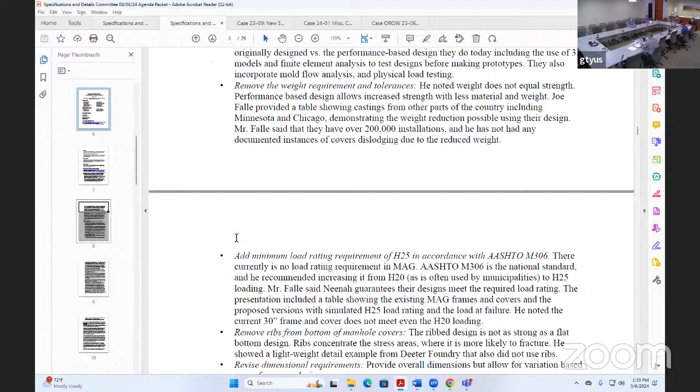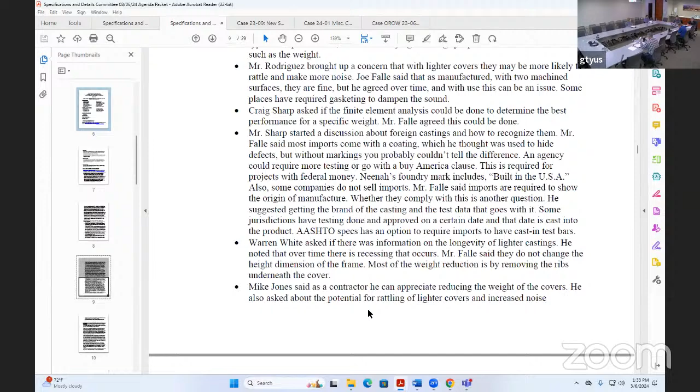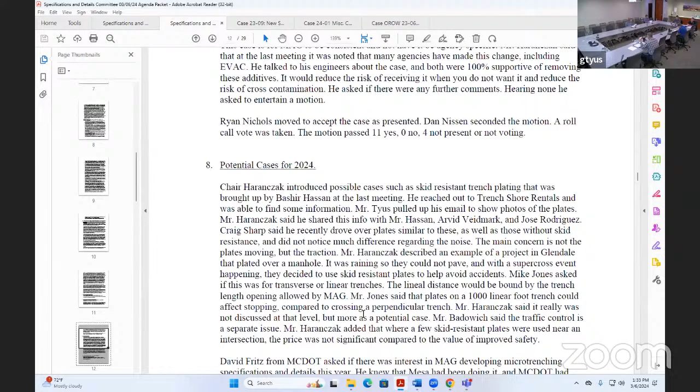Agenda item number 3 is the approval of February 7th, 2024 meeting minutes. Gordon will pull those up. If you need to refresh your memory on the meeting minutes, feel free to look at your screen. Keep in mind that you could also follow the previous meeting on YouTube. It is broadcast there.

All right, at this point, I'll entertain a motion to approve the meeting minutes. Gene, I'll motion. Mr. Chair, this is Warren. I had one correction that, Gordon, I had emailed you after the fact. I can speak to it if I'm able. Yes, please do, Warren. Item 5, second paragraph. Gordon, if you wouldn't mind scrolling up to that.

In that second paragraph where it starts, Warren White said, it should say Warren White said he plans to update the connections detail to add the twist lock connection, parentheses, snake bite, which is more robust than the direct bury wire nut. Period. Thank you, Warren. Good catch on that.

Warren, was what you just said in the email you sent me, so I can just copy and paste it from there? I believe so. I may have paraphrased in the email I sent you, but I can send you specifically that verbiage if that helps you. Yes, that would, so I get it in the minutes correctly. Thank you. I'll send it. Otherwise, everything looks good. Thank you.

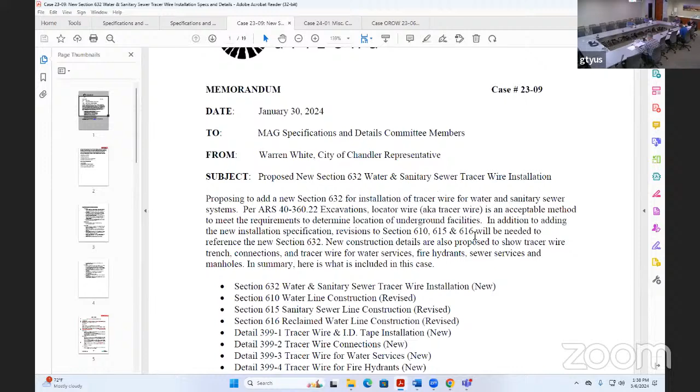New construction details are also proposed to show the tracer wire trench, connections and tracer wire for water services, fire hydrants, sewer services, and manholes. I did circle back with my water distribution group, and they had a comment or two that our representative was going to take back to the water sewer working group. I don't recall what that comment was. It was something to do with the termination inside of one of the boxes, but we'll open this up for discussion if anybody has any questions or wants to discuss this topic.

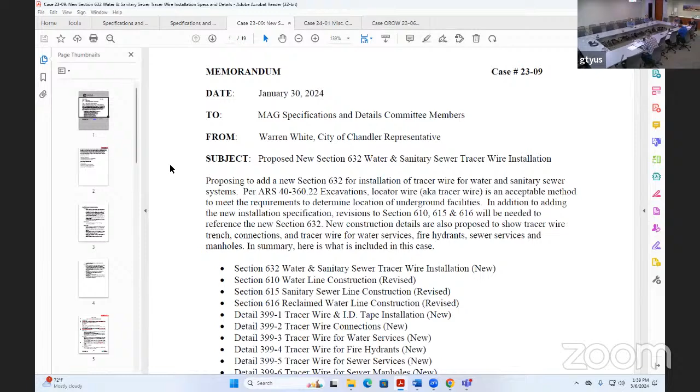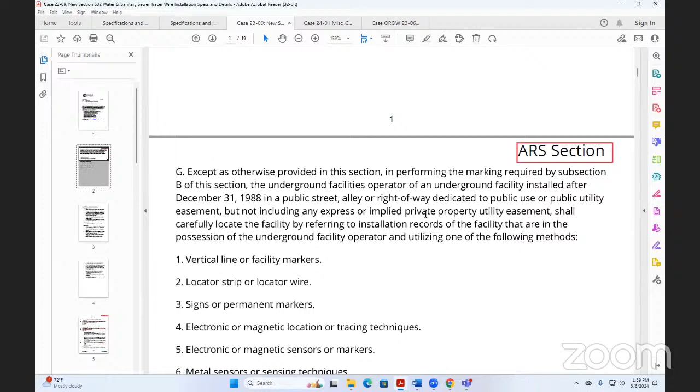Mr. Chair, I might just add, this update does include some comments from City of Phoenix, some of their comments that I received from them. I summarized the March updates right there. So that's what's new here. In addition, I have shared this out to another entity. The company is Copperweld. I sent that out last week. I have not received any feedback yet, though. Okay, thank you for that update, Warren.

Does anybody else have any comments, questions, anything they want to bring up on the tracer wire? All right, hearing none, we'll go ahead and move to agenda item number 5. These are new cases for 2024. We have Case 24-01 miscellaneous corrections. We're looking at section 325.8 quality control. Second paragraph, remove the extra space in shall.

There's another miscellaneous correction that I wanted to bring to everybody's attention. I'd like to put it under miscellaneous corrections, and that's to align MAG 120 with MAG 270 for the verbiage related to the concrete adjustment and the radial score marks around. I believe it's 120. 120 does not include the radial score marks. Thank you, Gordon, for bringing that up. 270 does. Everything else matches as far as the type of concrete, MAG AA, the thickness, the diameter, everything else. It matches perfectly. It's just that one item we're missing.

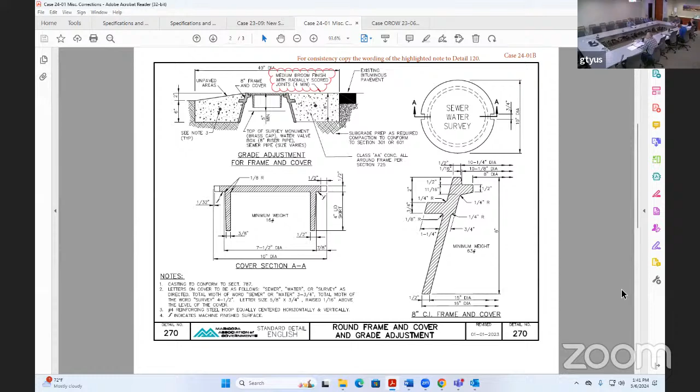I'd like to get some support in moving the radial marks onto 120. If we have support with that, we'll get that on for miscellaneous corrections. Does anybody have any comments or questions on this topic? That's a great catch because I didn't even know that it wasn't in there. Just like everything else, this is stuff that's brought to my attention by others, and I appreciate that.

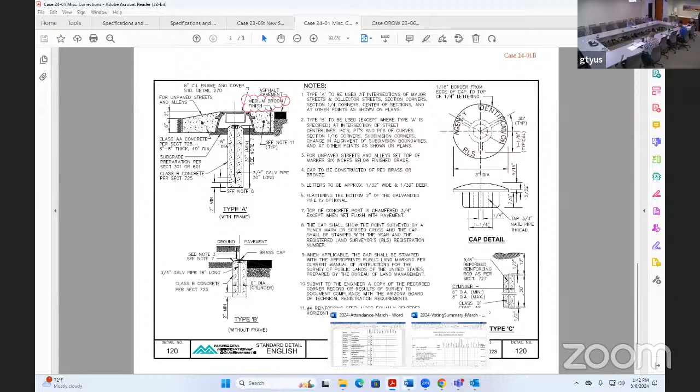Gordon, would you be able to put this under miscellaneous corrections for me, please, for the next meeting? Certainly. I think, to me, it's a no-brainer. I'd like to get some input from the rest of the voting members or even industry for that matter. It's pretty straightforward. Yeah. So we potentially have one more. Gordon's going to bring it up right now. Okay. And see what the consensus of the group is.

At our last working group meeting, we had something brought to us in MAG section 714. Let's see if Gordon can bring it up here. Give him a second. It's easier if it's on the screen, probably, to kind of walk everybody through it at the same time.

No, but I can resend it real quick, but it was on the 16th. It was back on the 16th. I can probably resend it just as fast. Oh, there, you got it quick. Never mind, Gordon's quicker than I am. No, so it was that one. Yes, right there. So if you would hold that one up.

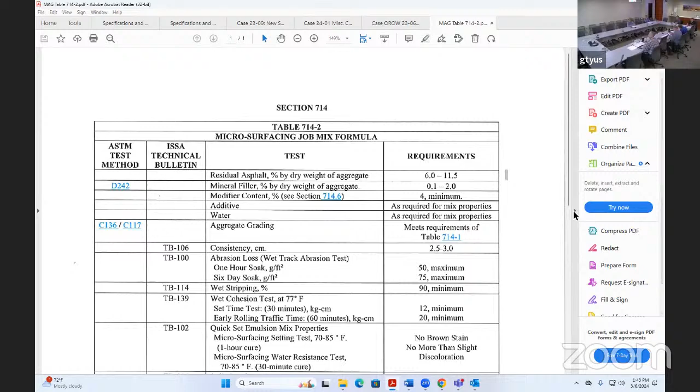So this is in regards to 714-2 and microsurfacing and the job mix formula, if you can roll up just a little bit. So the technical bulletins are basically from the International Slurry Surfacing Association. These are all documents done by them. It's been referenced in MAG for a long time. Very similar to some of the AASHTO or ASTM updates when we get them.

It was brought up to us that in the 2022 revision, TB 147, the second one up from the bottom, the specific gravity maximum has been removed from that technical bulletin as of 2022. That was the only change to it, and they were asking basically if we update and follow that bulletin as listed, there's no maximum specific gravity requirement within the new bulletin. I don't know if that would be a miscellaneous correction. I think that would lean more toward a case.

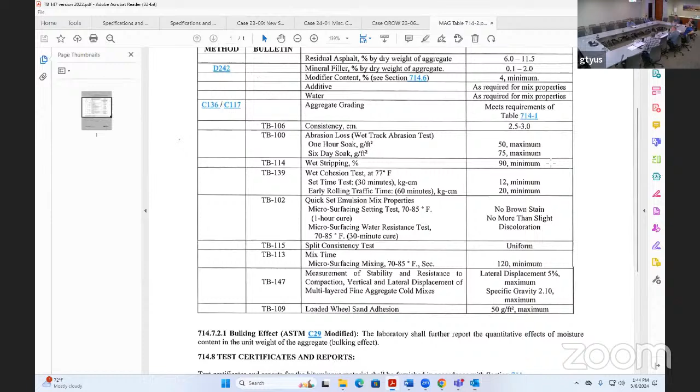And do you have the technical bulletin? It's another one of those attachments, I believe. So there's the two versions. You've got the 08 version and the 22 version, so you can see the differences, and then the response from ISSA themselves as to the reason why. I have to roll through that one a little bit.

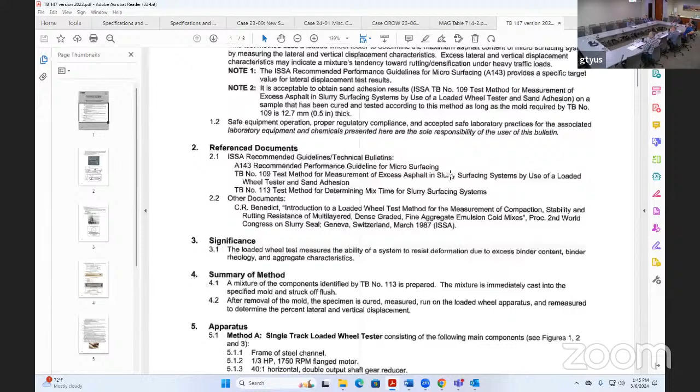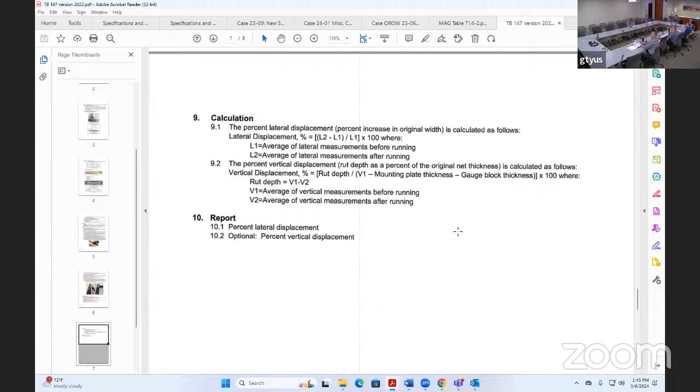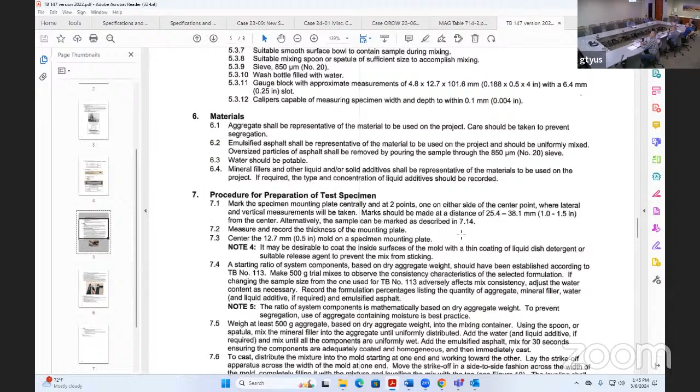Yeah, I'm trying to remember where it's at in here specifically. Maybe before that. So loaded wheel test, keep going. And it might just be in the old one. The fact that it's not in the 22 version, it might just be in the old one where it's no longer even mentioned in the 22. So they deleted it completely, the paragraph. Yes.

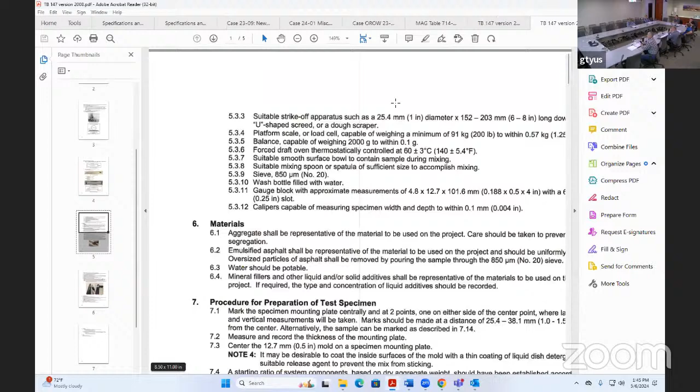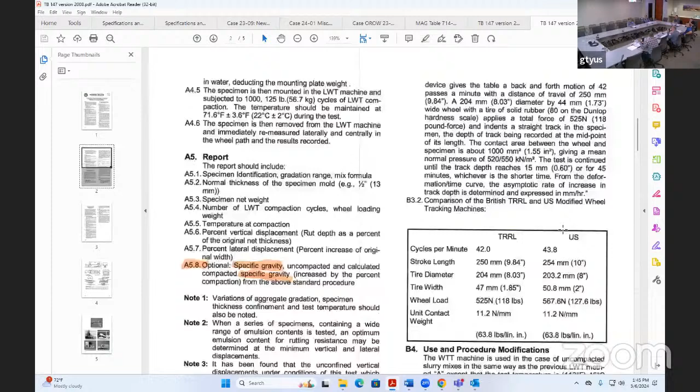Did they provide a reason why on their update? The email actually explains it very well from ISSA themselves as the reasoning why. Yep, actually, that might actually be better. Gordon, if you pull up the email, the email response there from them. Are any of the voting committee members aware of this change? If you are, let me know.

So there was the inquiry and then the reason behind it, he begins to go through there too, but we can set this up as a case as well. Sometimes when it's just updating one, it's always like, where exactly should it fall? Should it fall under miscellaneous? Yeah, I totally understand where you're coming from. I think we should move it as a case, just because it is technical, it does involve specific gravity and whatnot. And you have the backup documentation for it. That'll give everybody an opportunity to review it. Okay. We could put it up as a case. I'd like that. Okay, thank you.

Mr. Chairman, this is one of the things that is an issue when we reference these kinds of things and then we take part of the verbiage language out of it and incorporate it into one of the specs. This becomes a problem when that gets changed. Now we've got to go in and make a change to our specification. That's why we try as best we can, if we're referencing an ASTM or an AASHTO document for a test method or a standard, to just utilize that and not try to pull any language out of it

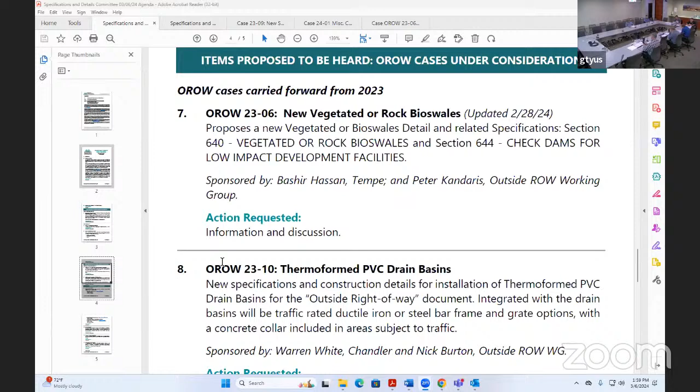Any other potential cases for this agenda item? Mr. Chairman, our Water and Sewer working group is working on modifying and clarifying the mandrel testing for deflection of installed pipe. I don't know if that's going to be ready this year. We're going to try really hard, so that may come forward. That's an item the working group is actively working on, correct? Yeah, and we've got a lot of interest from the contractors too, which is really encouraging.

So again, it's getting more clarification on the diameter that we're supposed to be looking for. Is it the mean or average? There's some confusion there, and we just need to nail it down. And then the actual mandrel itself needs to be clarified and more standardized, so that we're getting accurate results for the test. Yeah, I agree. Definitely. That's why we're pulling the mandrel, to get an accurate reading on that deflection, whether it's in compliance or not for the completion of construction and the 1 year, if you choose the 1-year deflection test per MAG. So that's an important item for sure when it comes to your PVC.

We're pushing for that, and we're also looking into some of the properties of the manhole ring and covers. There seems to be an industry push to make them supposedly stronger and lighter. That always generates discussion, but I don't know if that'll be ready this year.

Related to the manhole frame and cover, you're not sure, you don't think that we're going to push for a case this year on that then?

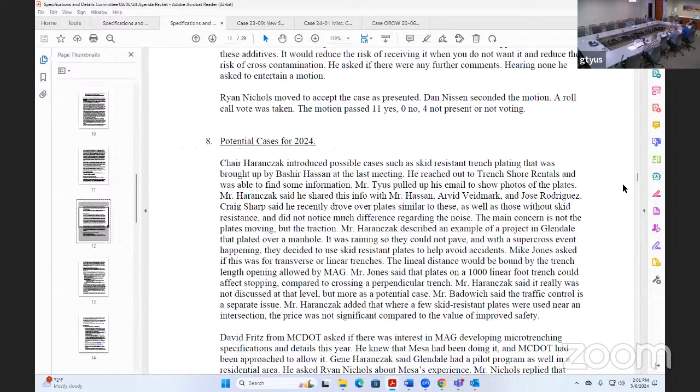I want to see more input from other manufacturers, not just one manufacturer pushing it. I would agree. Where we left off, it sounded like that supplier in particular wanted to take the weight out of the frame and not necessarily the cover, potentially removing the ribs from the cover to allow for a stronger cover.

I was actually expecting to see something coming from Neenah, I think it was Neenah that did the presentation on frame and cover. I was expecting to see something from them this year, but that's up to them, finding a case sponsor to bring that forward. I know they took good notes on the opposition and some of the concerns, and it's up to them to go through those and bring it as a case with a sponsor. But thank you for that update.

The other thing that might surface this year is an additional pipe material spec for the Hobas, basically the fiberglass pipe. The FRP pipe, it won't be called Hobas. The generic will be called FRP, fiberglass reinforced pipe.

There's a push for that because a lot of the boring companies now, the large diameter boring companies, are utilizing that because it's faster, the installation's faster, and just as strong. And the railway companies have approved it, so we just need to catch up with what the industry's doing on that end of it.

So we might include a case to add FRP pipe to the materials. And that would be intended for direct bury. Is that correct? Either or, direct bury or jack and bore.

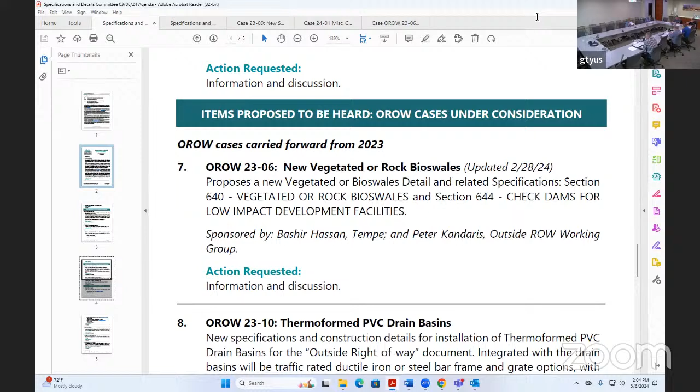All right, we'll move into agenda item number 7, items proposed to be heard outside of right-of-way cases under consideration. This is a case that was carried forward from 2023: new vegetated or rock bioswale. This proposes a new vegetated or bioswale detail and related specifications.

As most of the members already know, we've set the framework for the outside of the right of way. Now we can start populating with details and specifications for that publication. Who do we have? We have Bashir and Peter sponsoring this case, correct? Yes. I didn't know if Bashir was on the call today or not. No, he's not on today.

Okay, so we did have a new submittal. It's really just to get the numbers finally in there, so the references toward the standards and the detail numbers are now shown on there. There's nothing else that really changed on it. So we're still in that process of wanting to get any more comments up to this point, so we can get this one put to rest.

Have you received many comments up to this point? Last year we did get some, and we made those changes last year when we were still working through it. As far as I know, we haven't received any new comments in probably the last 8-9 months.

Peter, I've got some comments. I've been viewing it, and I think it's probably best I just email them over to have you start looking at them. It's probably more than we want to go through in this meeting. So let me just start by emailing you those comments, and then whichever ones we want to address in the meeting next month would be great.

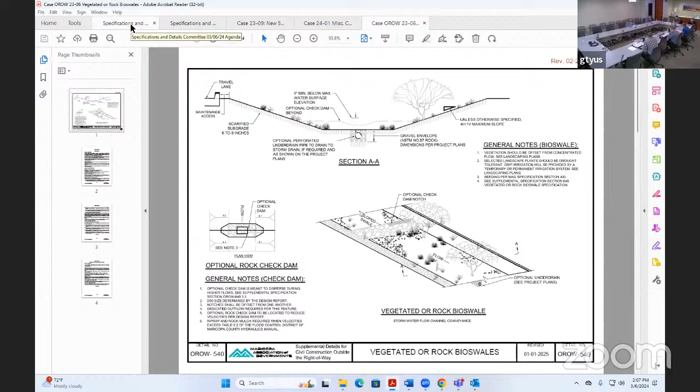Thank you for the update, Peter. All right, we'll move on to agenda item number 8, outside of the right of way. This is for the thermoformed PVC drain basins, also for the outside the right of way document. This is to integrate these basins and use a more cost-effective way to develop outside of the right of way. I know last time we were talking about the concrete collar in the high traffic areas. Warren, do we have any updates on this case?

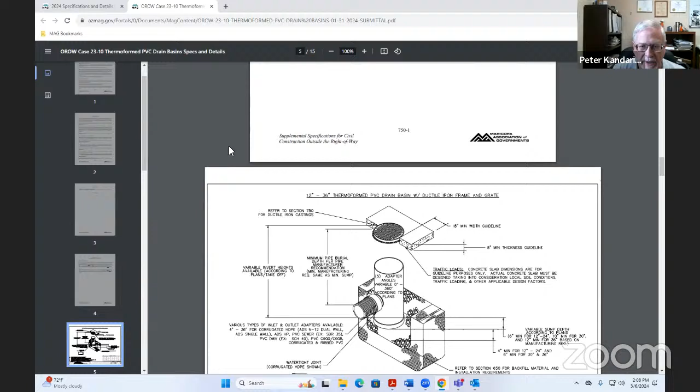I don't have anything new to share other than the update that we gave in February, unless it's been discussed in the outside right of way. Now, I think we were waiting for additional comments on that. We talked about it last meeting, some suggested things for the committee to look at in terms of the details themselves. Are they detailed sufficiently for you, specifically with the grates? Items like that, review the notes if there's something. So I want to make sure we get comments on this one before we move too far forward with it.

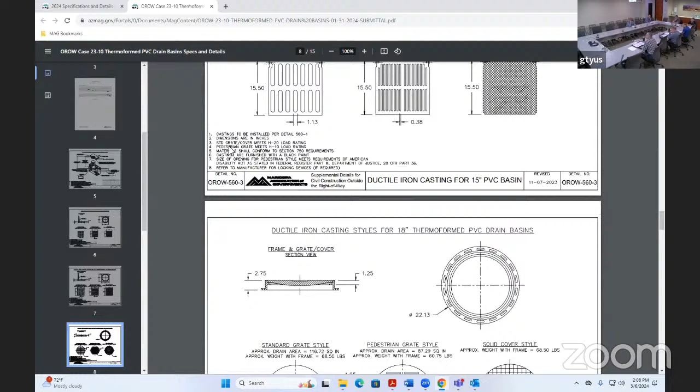Okay, I know my comment from, I don't know if it was the last meeting or the previous meeting, was just based on the apron around the frame and cover to align with the adjustments, similar to what you see out in the right of way with the MAG AA concrete, just to keep that frame secured.

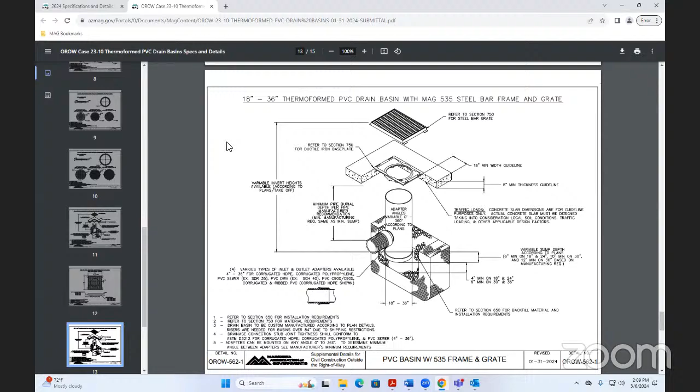Sounds good, Mr. Chair. I'll make sure we share that out with Nick Burton with ADS to make those updates. All right, thank you, Warren. Anybody else have any questions, comments on this item?

All right, hearing none, we'll go ahead and move on to the items proposed to be heard. Other items, this is agenda item number 9, the working group reports. We can get some reports from the chairs, starting with the water sewer working group.

Thanks, Mr. Chairman. So we met on February 20th, 1:30 online only. We basically just talked about what we've already discussed previously here. We had a little more discussion on the locator wire. I don't think Warren was there, but we had some discussion. Warren, did you get any feedback on that?

I did not, I apologize for not making that meeting. I got my dates mixed up. I apologize, sorry.

But yeah, we don't have too much to add. I think we want to make sure we cover the testing part of it. Other than that, I think we're doing really good on it.

So we had some discussion from Neenah on the covers, on the manhole covers, some of their justifications why, and so we had some good discussions on that. But there is a concern with the weight aspect of it, so we'll see where that goes.